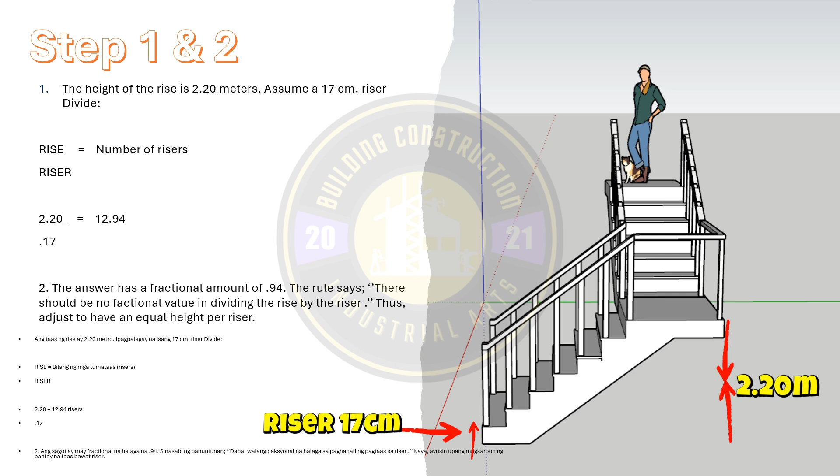So, rise over riser. So, rise is 2.20 meters divided by 0.17 as our riser or assumed riser in centimeters. So, 2.20 divided by 0.17. So, the result is 12.94.

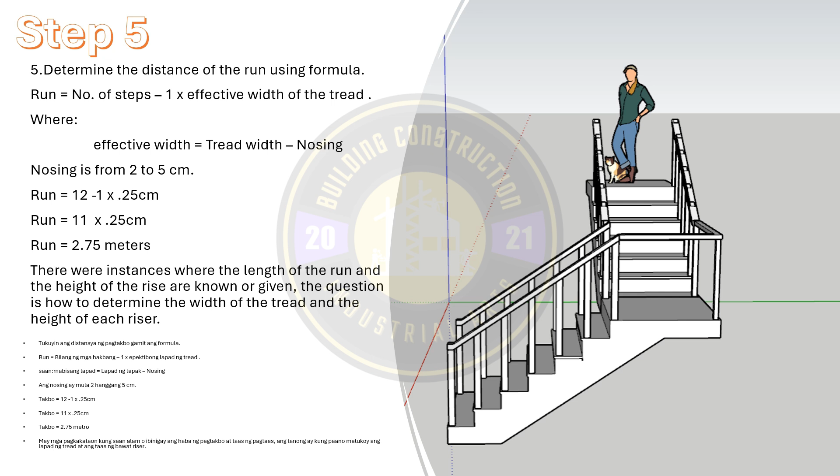So, there were instances where the length of the run and the height of the rise are known or given. So, the question is, how to determine the width of the tread and the height of each riser? So, here we'll do a simplified calculation. Instead of 5 steps, we'll do just 3 steps so it's easier to compute the stair. So, for example,

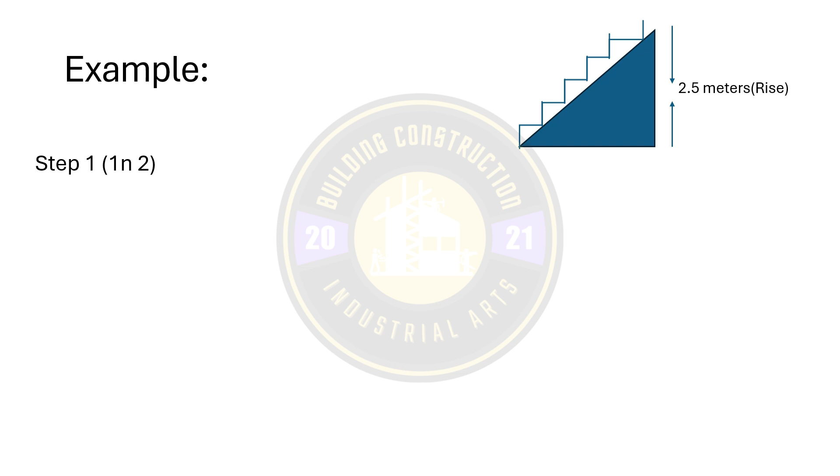So, step 1, we combine 1 and 2. So, formula is rise over riser. Our rise is 2.5 meters. The assumed riser is 0.17. So, 2.5 meters divided by 0.17 is 14.70, or 14. And that is the number of steps.

So, step 2, combination of 3 and 4. So, rise over number of steps. Our rise is still 2.5 meters divided by 14. 14 is the number of steps. 2.5 meters divided by 14 is equal to 17.85, or 17 centimeters. And that is our riser.

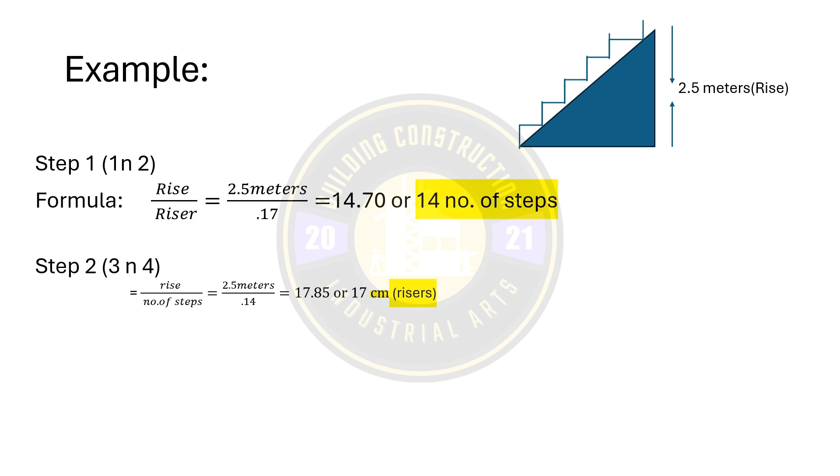Step 3. So, formula is run equals number of steps minus 1 times effective width of the tread. So, run equals 14. 14 is the number of steps, minus 1 times 0.25. So, run equals 14 minus 1 is 13 times 0.25. And 13 times 0.25, the answer is 3.25 meters. So, this is our run.

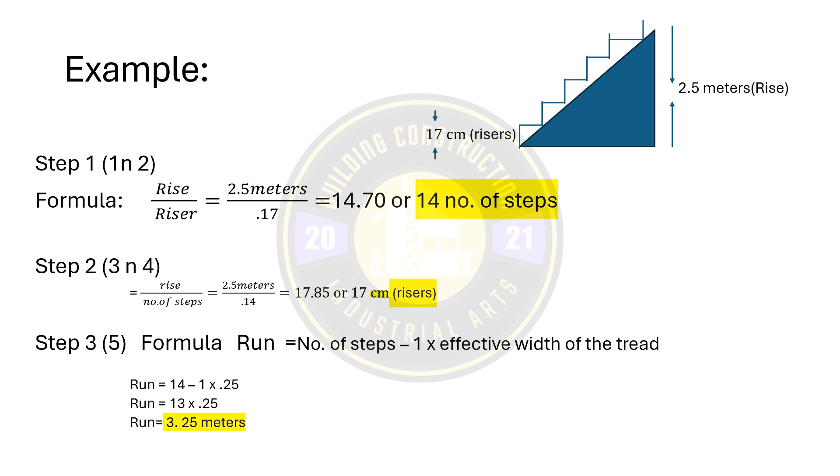So, we can see in our illustration where the run is and where the risers are. There are our risers, 17 cm, the height. So, that is 3.25 meters. This is our run.